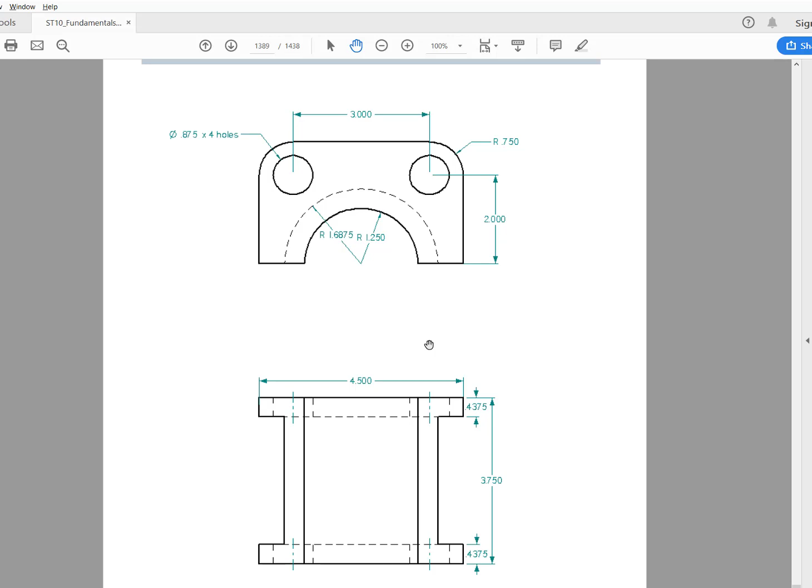Switch back to my Solid Edge. I'm going to try a vintage dark background and see how that looks on YouTube. I'm going to utilize the simple box command with the symmetric option set by center, lock to my plane.

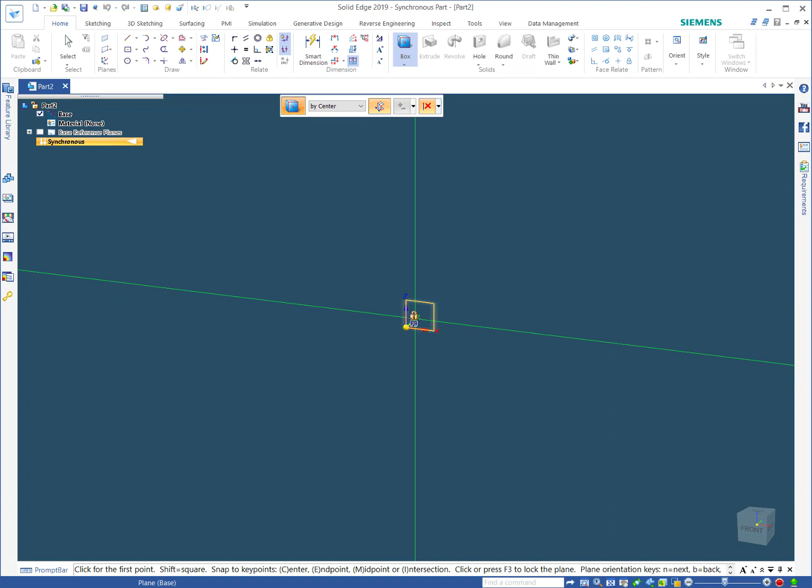I look at the drawing and I see this part is roughly 5 inches, so I'm just going to eyeball it. You want to get it kind of close. And the overall length is roughly 5 inches as well, so I'll just kind of eyeball that.

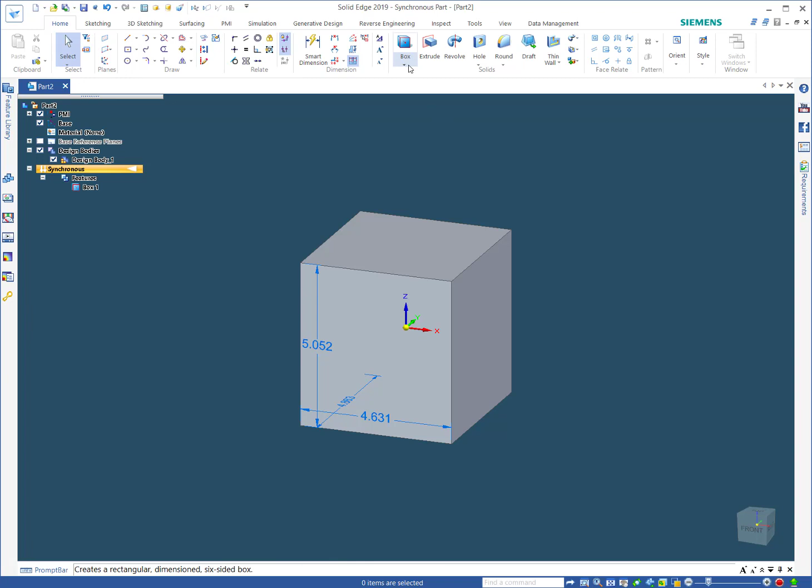So then there's a hole and there's a circular cutout. Maybe we'll do the hole first. You probably could use a cylinder for that.

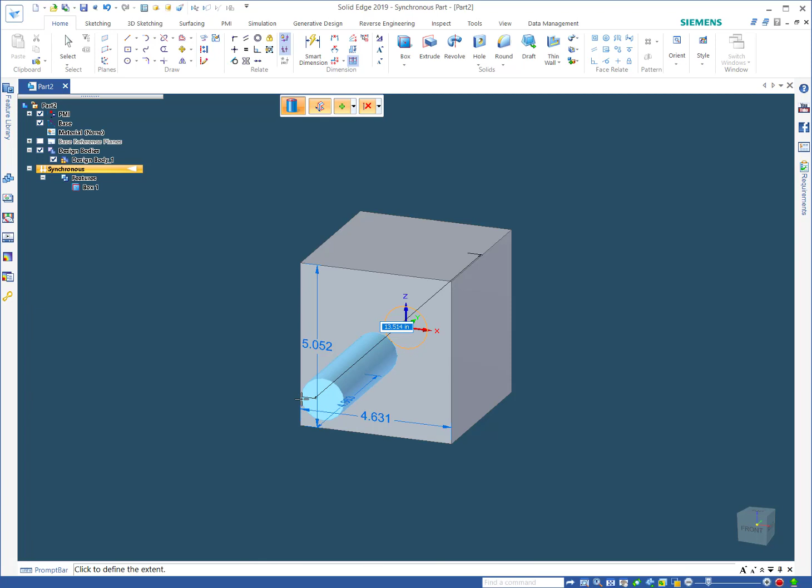Just notice the symmetry is still engaged. Maybe I'll use my quick pick, wait for the... and pick that center base plane to be locked to. And the through hole, again, I'm just going to eyeball it and tap my space bar to make that do a cutout.

For the other kind of like a belly, I guess you might call it, I'm going to do a circle. This is a pretty cool capability that Solid Edge has, utilizing open profiles. First I'll just draw a sketch.

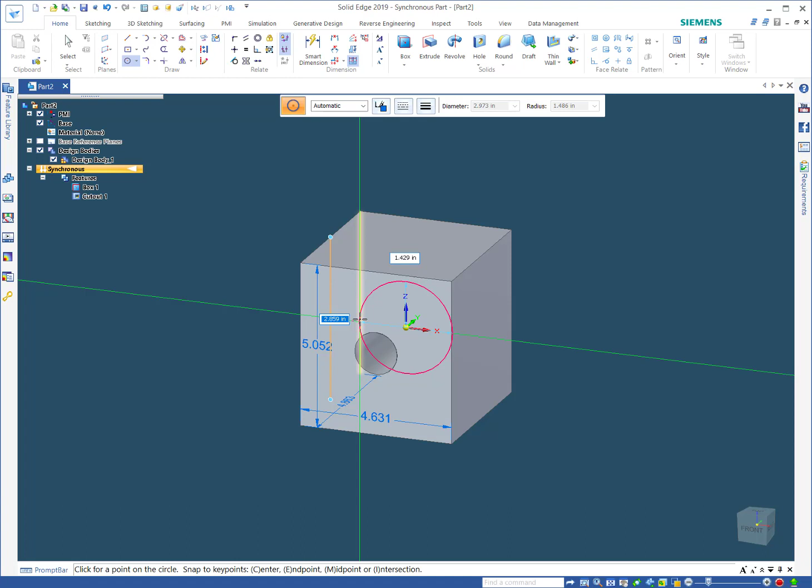A little bit bigger than the hole, and then we'll go to the extrude command and I'm going to pick single. You get a little different capabilities with different selection options.

I do want it to do a cut, I wanted to do symmetric, and I want to be able to change the side step.

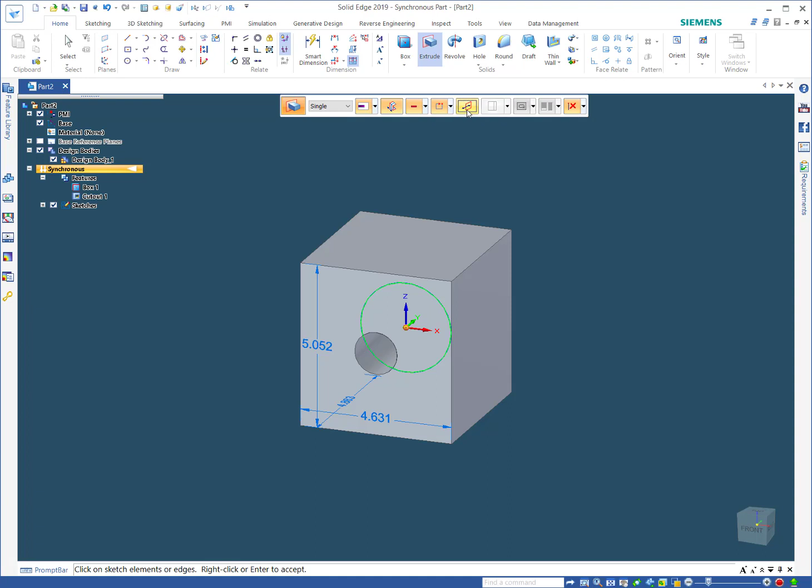And if you just poke this, you'll see it will toggle. So there it's doing a cut on the interior, and if I poke this button, it's cutting the exterior. So there I can have it cut to the outside.

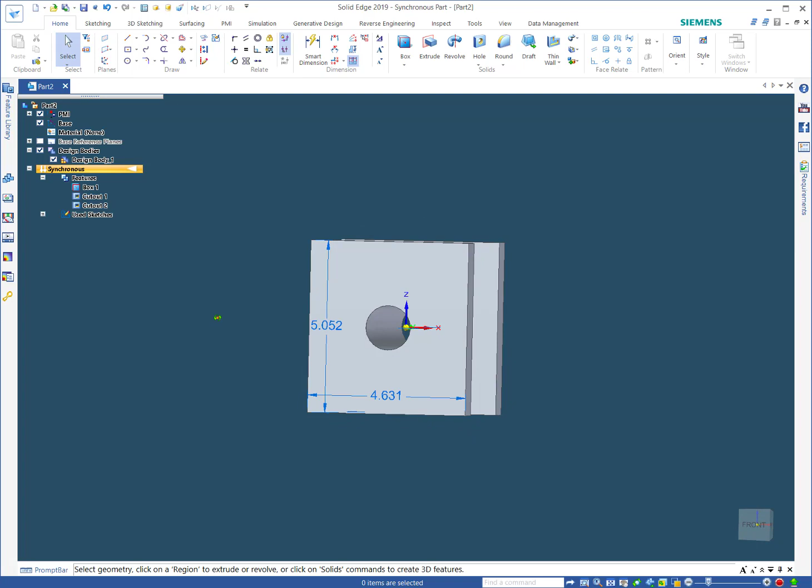And you normally might think your first thought might be to do a revolved cut or something more complex, and that's not really necessary.

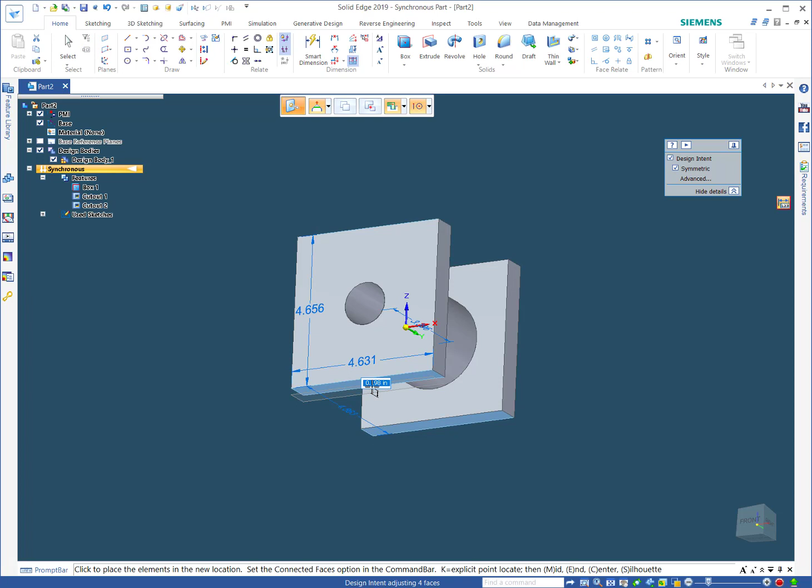Let's bring this part. If you have your drawing handy, you'll see that it's kind of half of a part, so we want to split it. I'm going to tap S on the keyboard to turn off the symmetry and key right off the center point. So I basically cut that part in half.

Use my radial menu and pull it around on these corners. Notice I'm not really being too concerned with the exact values. This is an example of how you might work in your ideation phase.

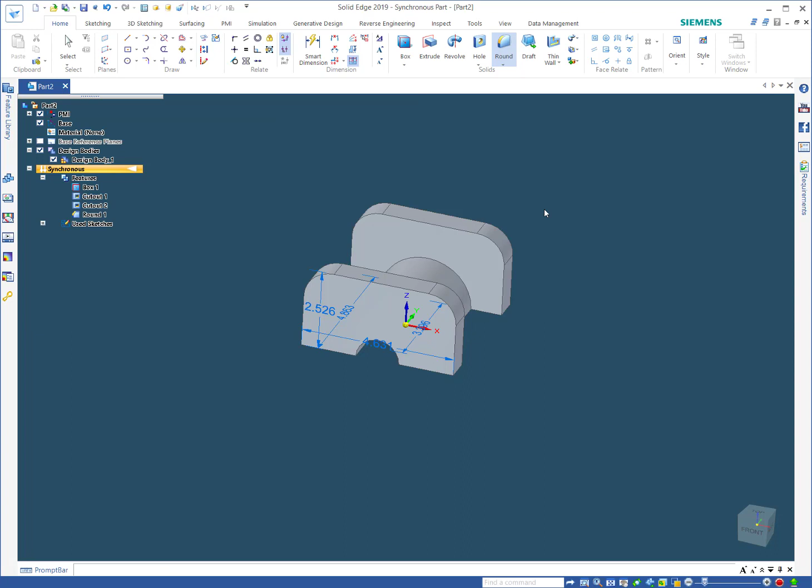You're not quite sure what you want to have. You just kind of want to get something roughed out to see if that looks like what you would want. So I might get to this point and be pretty happy.

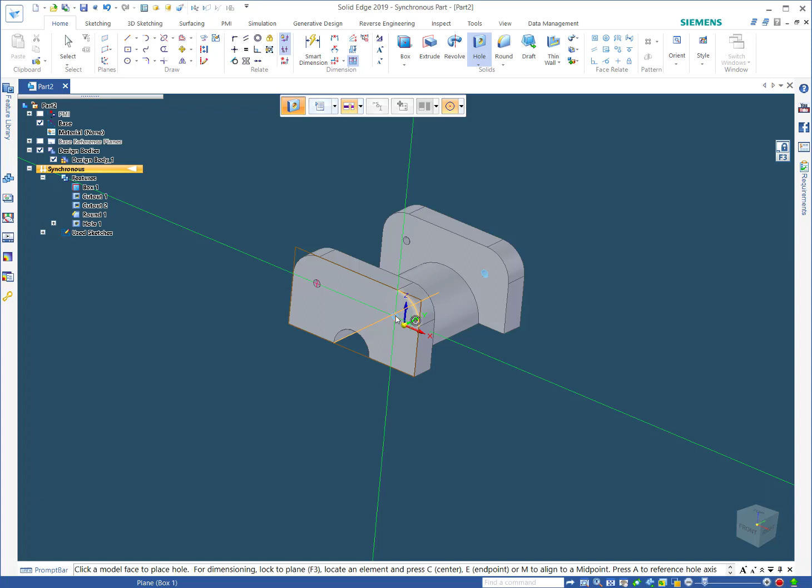I'm going to use my F3 this time to get locked. And I'll just poke some holes here. And I've set my extent to go through all.

So you might get to a certain point and say, yeah, this is good. I like this design. I'm going to move ahead with it. So now you can tweak it with dimensions. So let's add a dimension for the thickness.

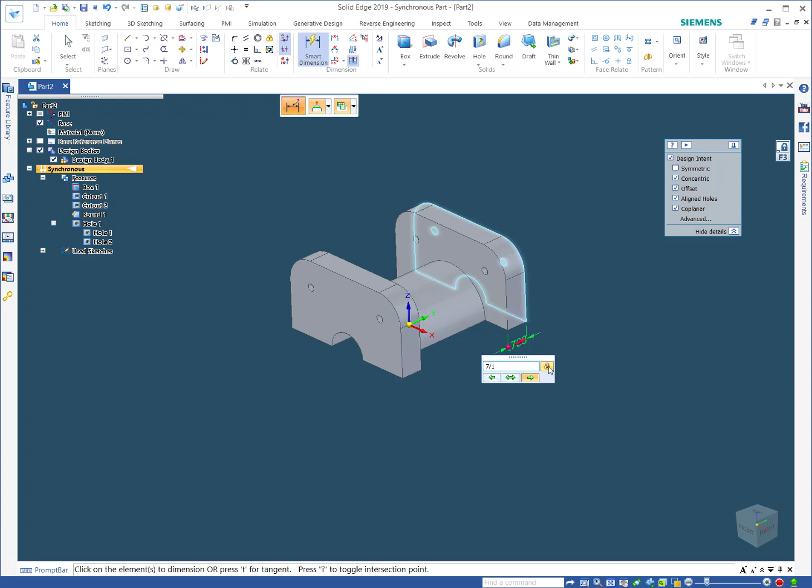And this one, I don't want it to move around, so I'm going to lock it at 7/16, which is .437. I'm going to undo that just so you can see what I did wrong.

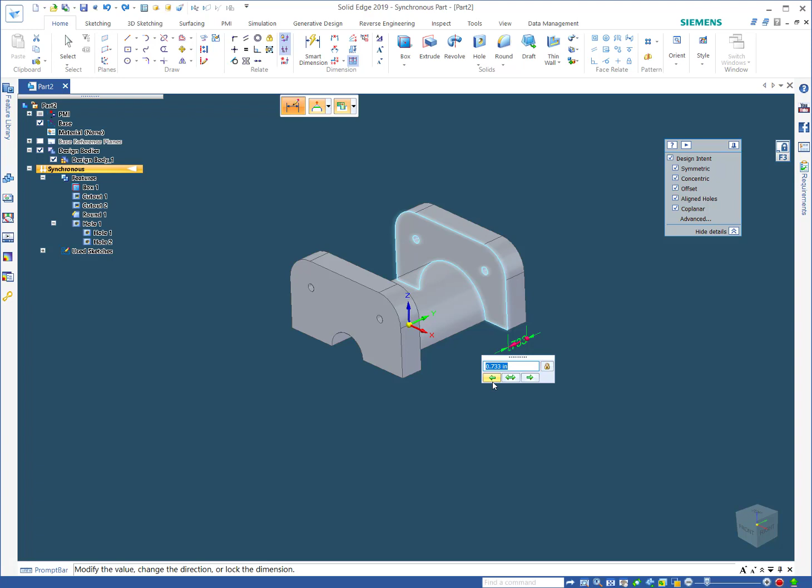When I adjust this, I want my symmetric back on. I'm going to tap S, and then probably want it to change on the interior side. So that's changing symmetrically because I built it on center.

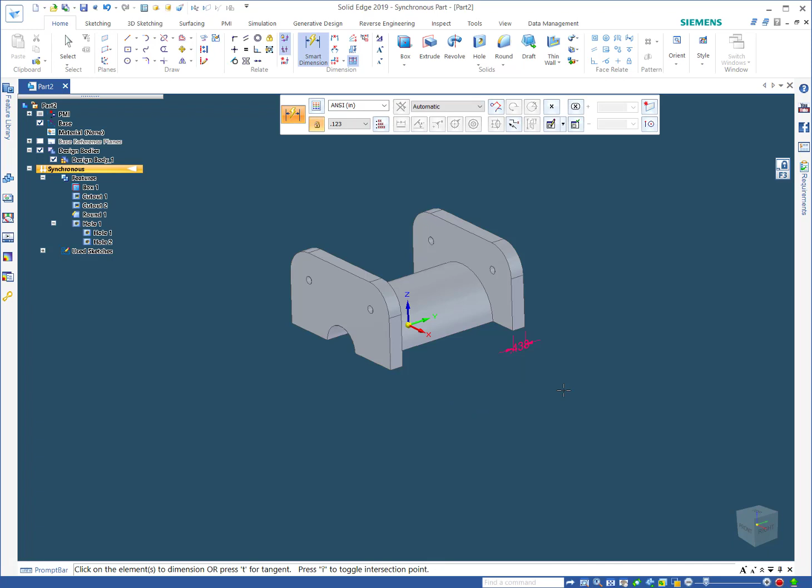And I'll place another dimension. I could click the inside edges, or whatever technique you like, and actually that should be the outside edges. I think we already have a dimension for that, and if we just tap the outside face, we probably see that there's already a dimension there for 3.75.

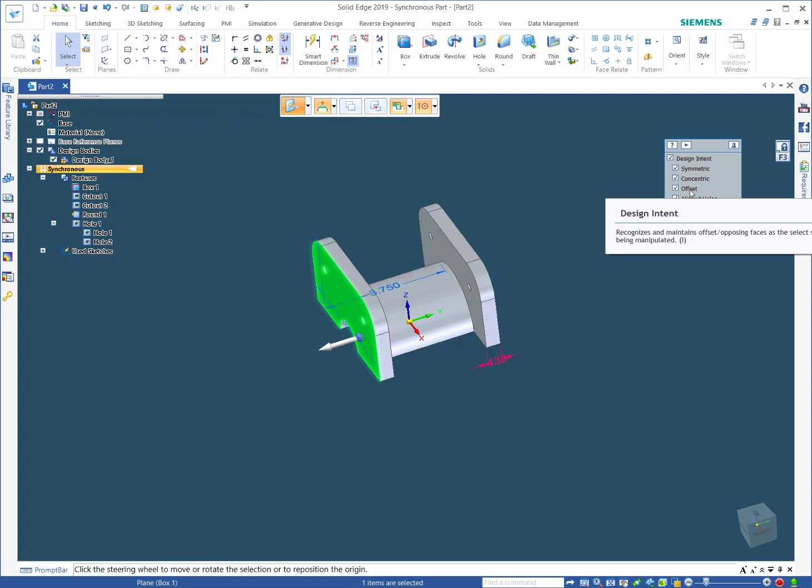And my red locked dimension is maintaining my flange thickness for me. Even though the offset may pick that up as a plate, offset maintains what looks like kind of a plate, is the best way to describe it.

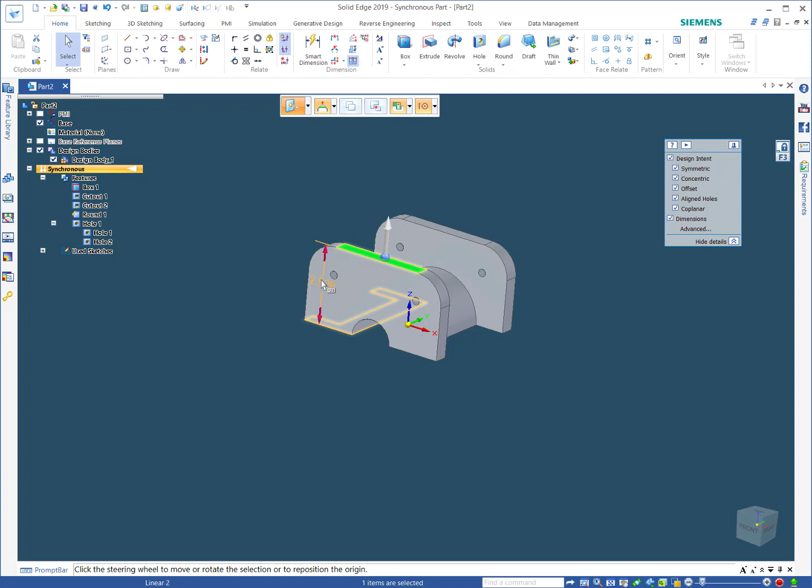That looks pretty good. I think we need, actually let's see what other PMI dimensions. See if there's one on the top. When you touch a face, if there is an existing PMI dimension somewhere attached to that face, you'll get that offered to you.

So this should be, you know, the drawing is actually not to the outside of the flange. The drawing is to the hole. So let's do that. If you really were working off a sketch or something, you don't really know that.

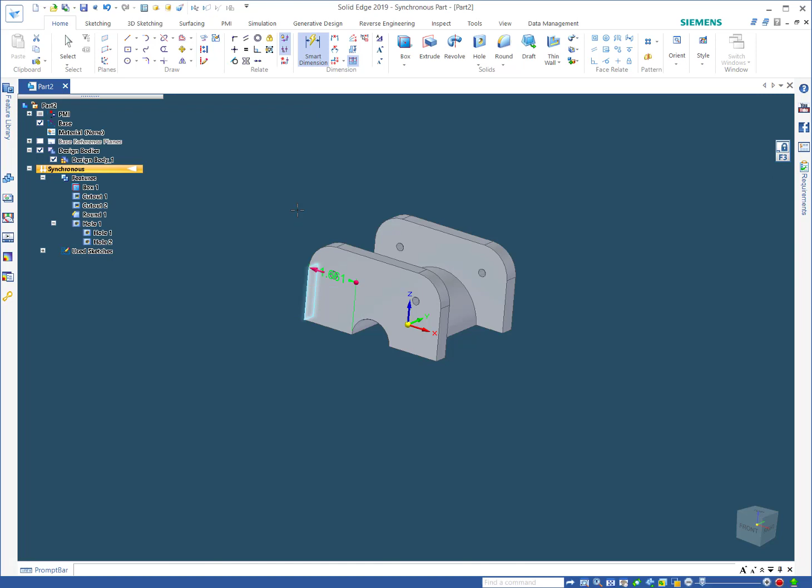I misclicked. A little bit of a lag when you're recording.

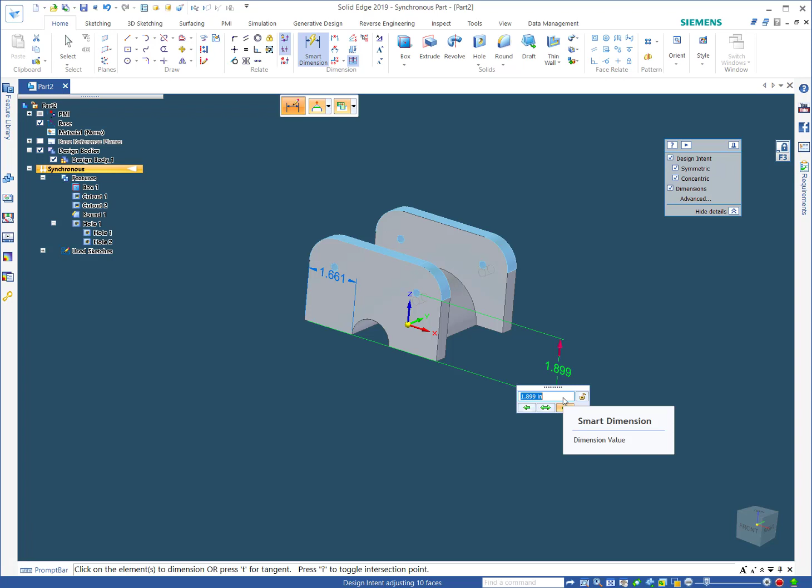The dimension is 2 inches from this face to the hole, so why not just drive the model that way? And you see that the software is maintaining existing conditions, so it's in essence maintaining your design intent by examining what's currently in the model.

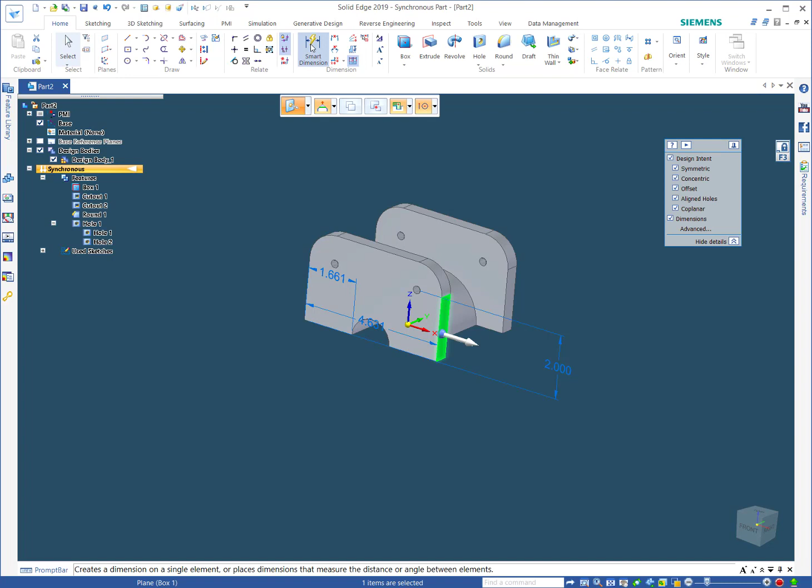And I think the width, there's probably a dimension hung off that, and that should be, again, the dimension is to the holes, so we could probably do a smart dimension to the holes.

And that is 3 inches. Again, the design intent system is maintaining that for me.

The through hole is 1.25 inches radius. That's pretty big.

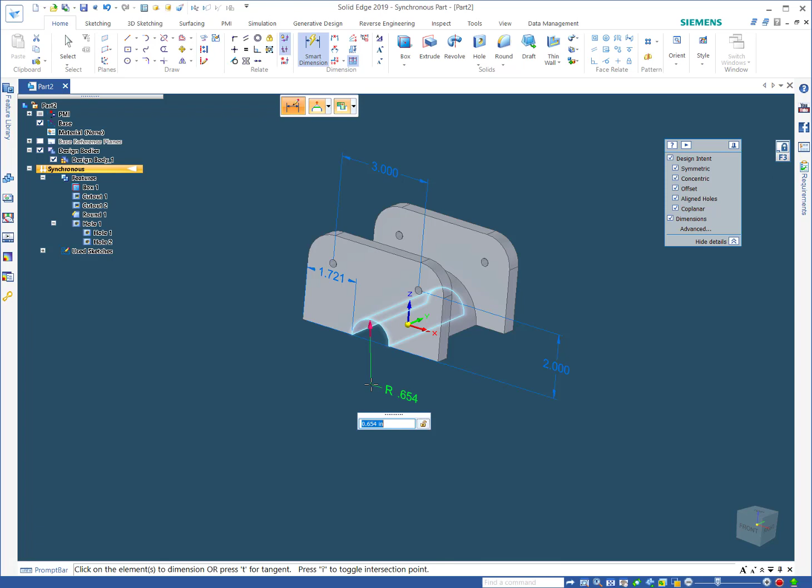And then this outside is 1.687.

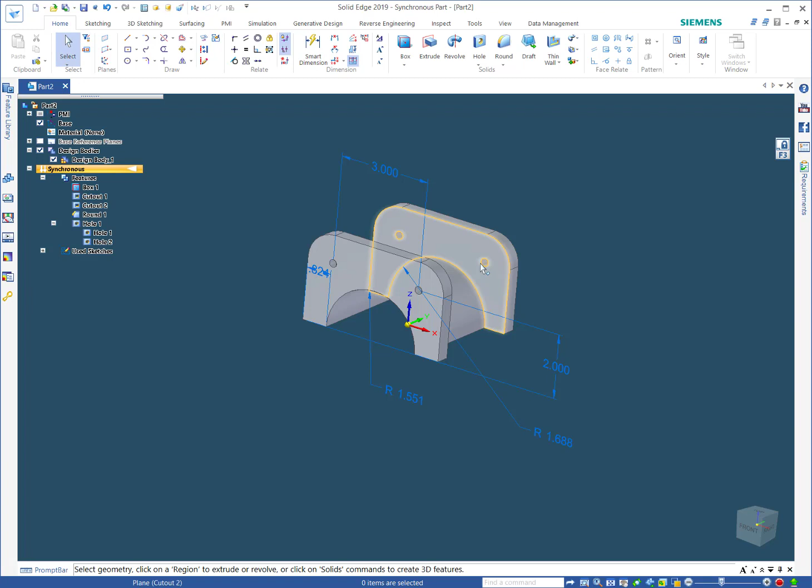And the holes are 7/8. So when you touch a hole, you have the little edit definition handle, looks like a leader.

Make those 7/8 holes, and they are on center to a radius of 0.75. Again, touch one of the rounds and then the edit definition handle.

Now, because we placed these all at the same time, it's picking those up. It looks like those are already correct. No, 0.75. They are not correct. Here we go.

That looks pretty good. And this, I should have locked that dimension at 2 inches if I was concerned about that moving.

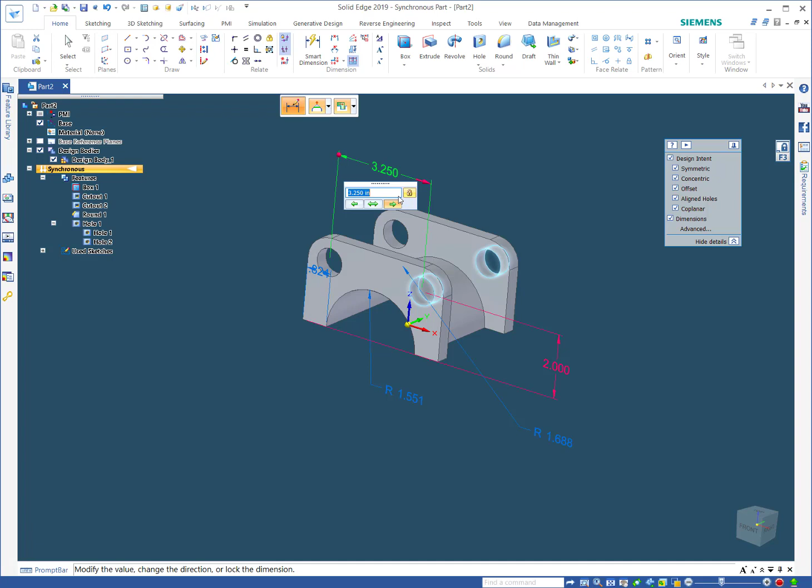And there you go. So this should be 3, and we'll lock that so it doesn't ever change inadvertently like it just did. And that looks pretty good.

Maybe we'll just set the material. Hide the PMIs, fit the view, and save the file. Very good.

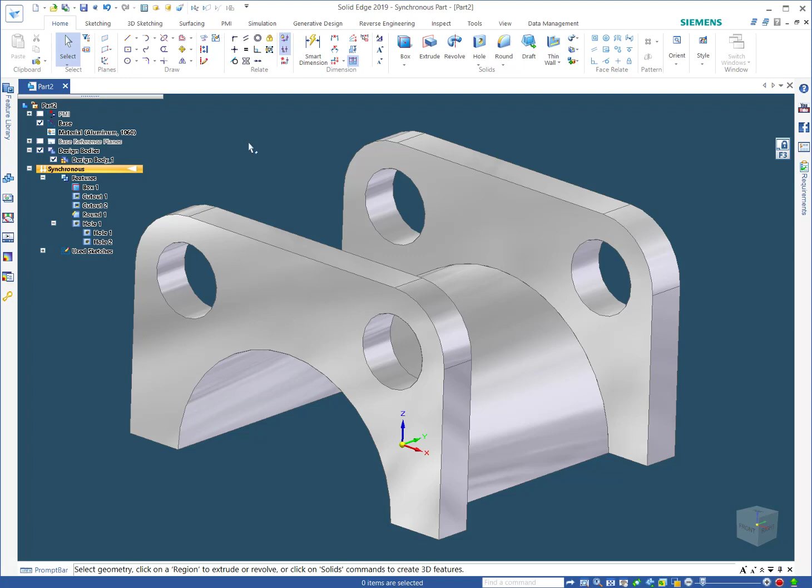So there's the second model, in the additional modeling projects in the Solid Edge Fundamentals course.